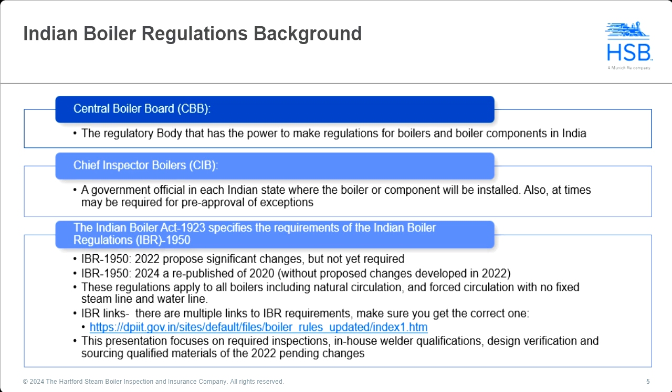So where does HSB come in? We are authorized by the CBB as an inspecting authority, an institution recognized in such a manner as may be prescribed by regulations for the inspection and certification of boilers and boiler components during manufacture, to provide the required inspections and reviews needed to comply with the IBR on the behalf of the CBB.

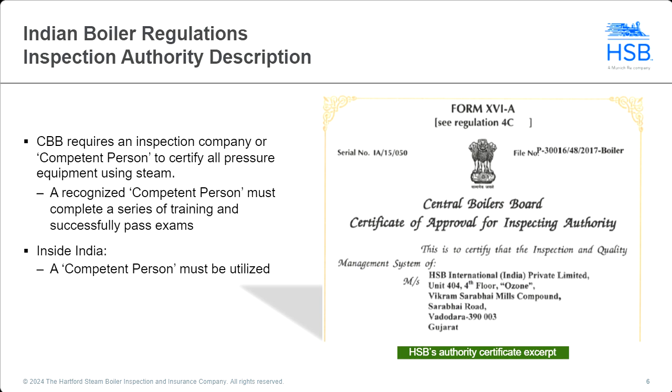HSB employees, competent persons, means a person recognized in such a manner as may be prescribed by the regulations for inspection and certification of boilers and boiler components during manufacture, erection, and use, both inside and outside of India. We hold two separate accreditations. In both cases, the competent person has to be trained, experienced, and pass performance exams.

Now that we've covered the initial regulatory updates, let's move on to specific changes and clarifications regarding the Indian Boiler Regulation of 1950. Number system changes. Firstly, the IBR has updated its numbering system. This might create some confusion with experienced personnel referencing sections without their descriptions. It's crucial to familiarize yourself with these changes to maintain clear communication and compliance.

Appendix reclassification. Next, we see a significant update where Appendix G now replaces Appendix J. The appendix deals with the inspection and testing of boilers, boiler components, and other parts during manufacture. Understanding this change is vital for those involved in these processes.

Alternative construction codes. Regarding the construction codes, while it is permissible to use a code other than the IBR, it is important to note that you need approval from the Chief Inspector Boilers in the respective state of installation. This requirement is detailed in Section 34, subsection 3 of the Indian Boiler Act. The approval process ensures that all alternative codes meet the stringent safety standards.

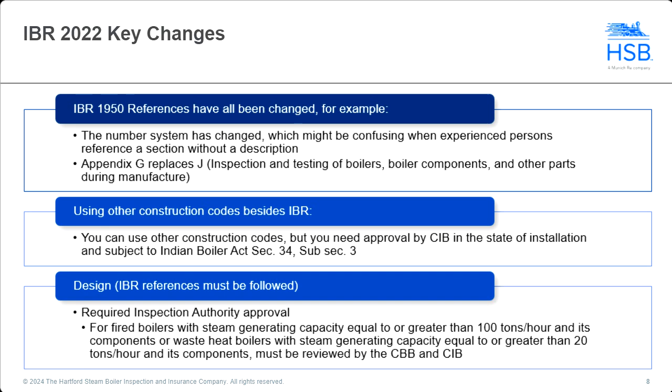Having discussed the inspection requirements, let's now focus on the specifics of material procurement under the updated Indian Boiler Regulation of 1950. Preferred procurement from well-known manufacturers. Firstly, it is still preferred to procure materials from a well-known maker who can provide the appropriate Form 4. This ensures that the materials meet the necessary quality and regulatory standards, simplifying the approval and the inspection process.

Regulation 5A application. However, in situations where procuring material directly from the mill is not feasible, Regulation 5A provides alternative options. There are two key sections under the regulation that can be applied. Section 1. This section allows for the use of materials that are fully identifiable and supported by a material test report. This ensures traceability and verification of material properties.

Section 2. Alternatively, materials that are fully identified with mill markings for a production lot but are not supported by material test reports can also be used. While this provides some flexibility, it still maintains the level of traceability and quality assurance.

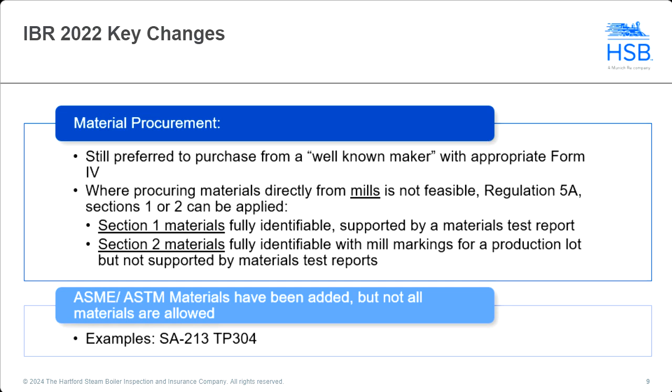Qualification of welders. Firstly, it is now mandatory for welding operators to be qualified. This change ensures that all welding activities are performed by individuals who meet the necessary skills and competency standards. Revised qualification range. The range of qualification for welders has also been revised. This means that the criteria and standards for qualifying welders have been updated to align with the current industry practices and safety standards.

Electrode and material classification. Additionally, both electrode and material classification have been revised. Previously used designations have now been updated to a new system. Electrode designations are now referred to as U numbers, and material designations are referred to as M numbers. This change aims to standardize classifications and improve clarity.

Qualification of welding plates. Moreover, any welder or welding operator who passes the test for groove welds in plates will be considered qualified for making welding plates. This ensures that those who meet the stringent testing requirements are certified to perform the critical welding tasks.